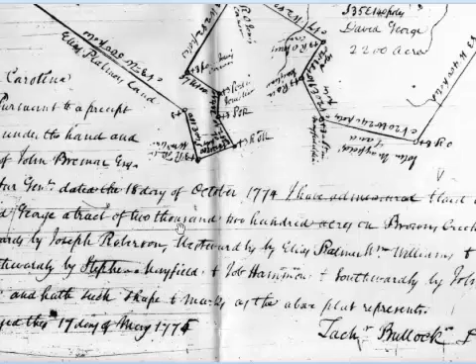This is a plat that goes back to 1774, and it is in South Carolina. It's rather old script and a little hard to read, but you can see the surveyor's signature here and the date of the survey, 18 October 1774. If I try to make sense of this, this seems to indicate a tract of 2,200 acres along a creek whose name I can't read real well here. Starts with a B. In the description here, it calls out the adjoiners.

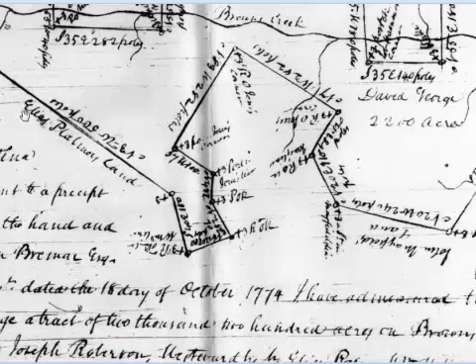The description reads as a bounds description. That is, it only identifies the adjoining landowners that abut the property being described. That is, there are enough landowners identified here to enclose the tract. However, if you look on this plat, not only are those owners identified, here you can see someone whose first name is Elias, indicated there, and over here on the east side, somebody Roberson, their land. You can see that listed, but you can also see metes information or measurement information of the boundaries.

Some of it is, of course, written upside down by our perspective, but some of it you can read somewhat clearly here. For instance, this line has a bearing of south 35 degrees east, and it appears that it is 480 poles. Now, you may already know that a pole is the same thing as a rod, and a rod is 16.5 feet. Our Gunter's chain of the 18th and 19th century was a 4-pole chain. That is, 4 poles, 4 rods long, 66 feet.

You can see several other measurements here, but notice the coarse nature of the directions and the distances, the nearest degree, and the nearest pole. So I think you understand there is some significant potential for misclosure, but they're doing the best they could with what they had.

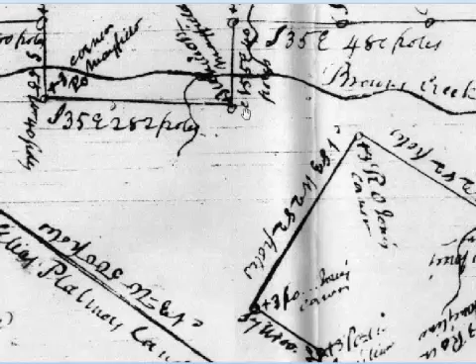The oldest plat that I have personally had to work with is from the 1830s, which was when you started to see plats showing up here in the former Northwest Territories that we now call Illinois. The interesting thing about boundary survey is that even though we can measure more precisely today, our precision does not override the legal standing of original corners. So if our measurements disagree significantly with the original monuments, and we can prove that those are indeed the original monuments, then it is the monuments on the ground that bear more weight than the measurements on the paper.

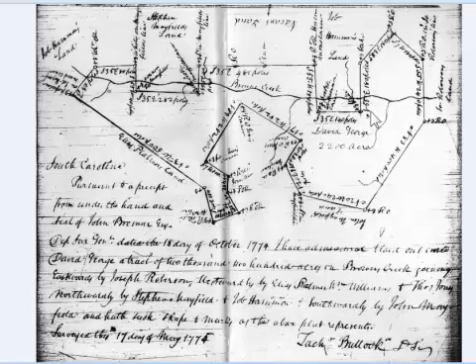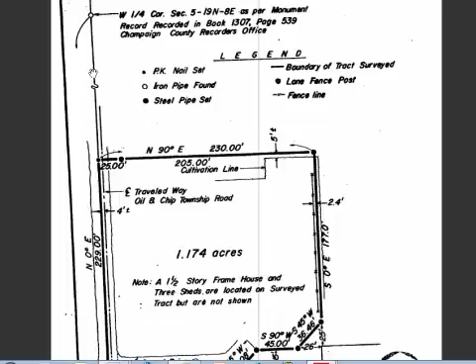A friend of mine lives here. This is a fax of that plat. This is not the entire plat, but this is the information that shows you where the boundary is. This particular plat seems to indicate that if you measure from the southwest corner of Section 5 in Township 19 North, Range 8 East, you measure north along the west line. You can see this is the west quarter corner, so this is the west line. Measure along the west line 682.66 feet to a point of beginning that you can see right there. It is a PK nail.

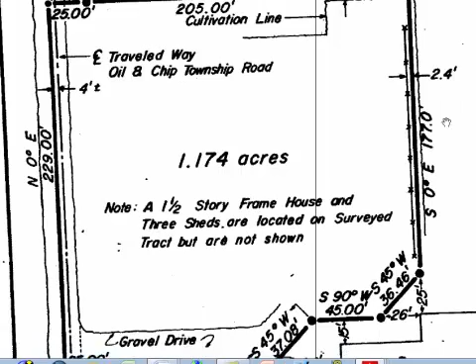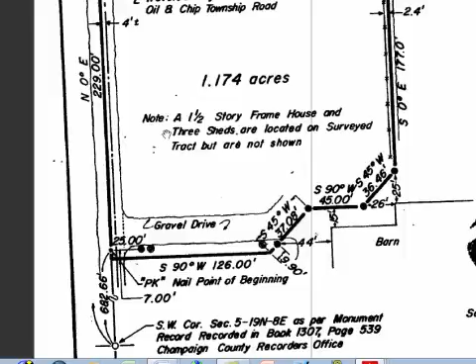Then you can trace around this tract using these directions and distances, and it will return to that point of beginning. Notice there are a few other features shown on this particular plat, specifically a gravel driveway. You also have distances to a barn here, and we have a note that says on this 1.174 acre tract there is a 1.5-story frame house and a few sheds, but they're not shown.

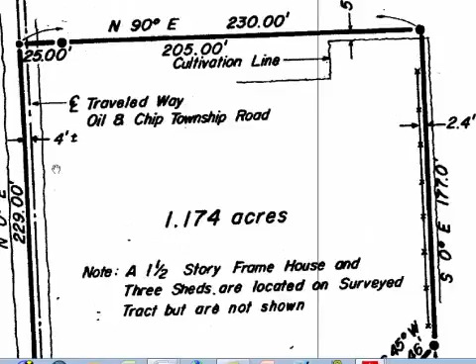You can see the location of the township road. And indeed, the section line, the west line of this section, falls out in the road. It doesn't exactly follow the center line. In fact, here it indicates that the center line of the traveled way is 4 feet to the east of the section line.

You can also see over here on the east side of the tract there is a rough measurement of 2.4 feet from the east line of the lot over to what appears to be an existing fence. Also, there are some cultivation lines here indicating where the edge of the fields are relative to the lot lines.

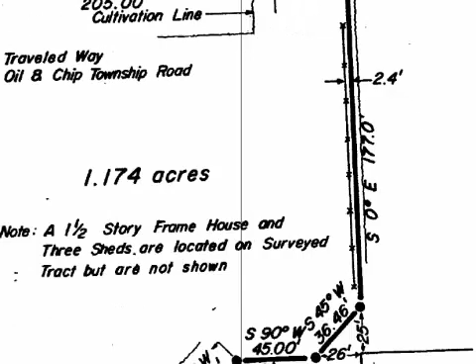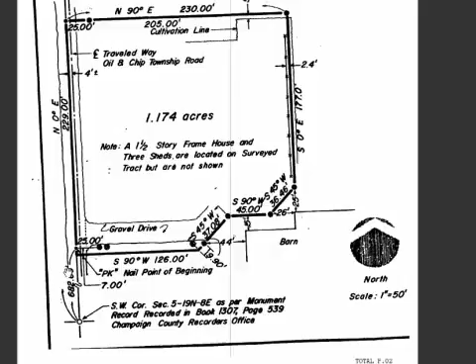All that information is designed to make the plat more usable to the owner. If you didn't show any of that information, then the owner would not have many references as to where those particular monuments are. Likewise, it makes life so much easier for any other surveyor that follows in their footsteps trying to retrace these points.

This is a plat for a simple metes and bounds description. The description is not shown here, but the evidence from which that description is written is shown clearly on this plat.

Now, I want to spend some time walking through a survey that I was involved with back in, I believe, 2006. And I want to use it to illustrate this, what we call waterfall model of the boundary surveying process. And this is one person's view of how surveying works.

The first phase, proposal, is the interface with existing and new clients to determine the requirements and to translate client requests into proposals. The land surveyor is often the first contact with the client, and through conversation with the client and perhaps the exchange of some information such as legal description or address or perhaps old survey information the client

may have, then the surveyor can initiate some kind of business proposal such as a lump sum contract or an hourly rate contract to do the work requested. And at this point, a simple contract is typically drawn up and signed by both parties.

To some extent, in the proposal phase, there is a bit of planning that has to go on and perhaps a little bit of research. Some of that planning and research may be streamlined by the fact that that company may have already done other survey work in the client's vicinity. So thus, the planning and research may simply be digging through company files and reviewing what has been done.